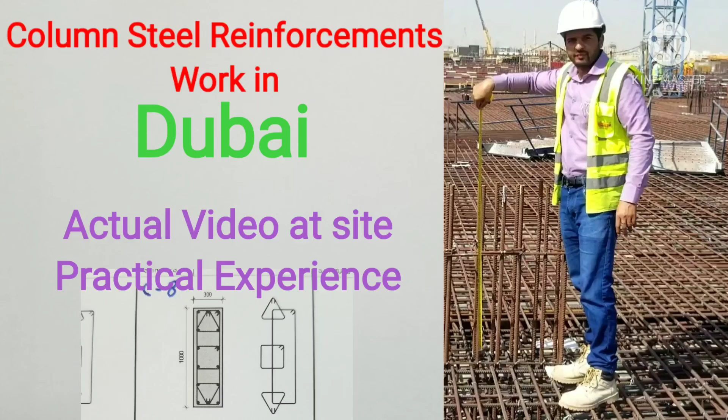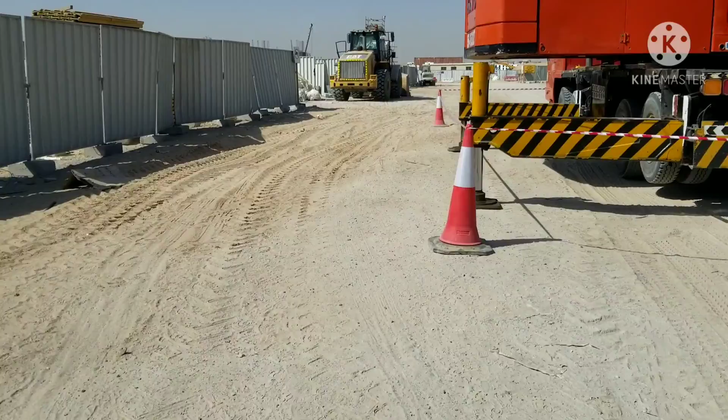Assalamu alaikum viewers. Today I will show you how to check steel reinforcement for column and how to execute column as per drawing. This procedure is followed in all GCC countries, especially in Dubai. I've been working for 7 years in Dubai and completed about 8 to 9 projects in this duration, and now I will show you how to check steel reinforcement as per drawing and how to execute the column step by step.

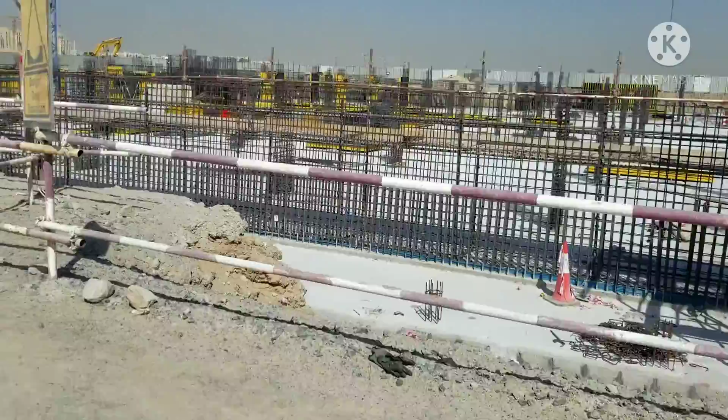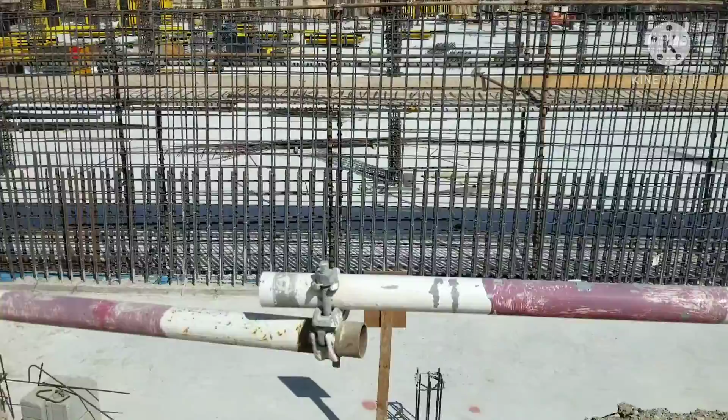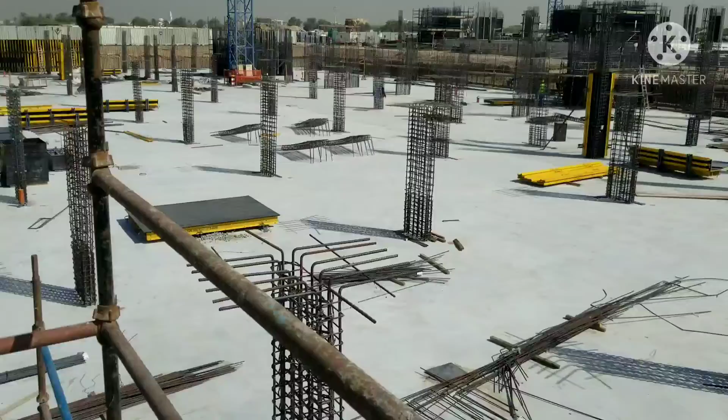So this is our new project, basement plus 10 floors, and now we have only casted raft foundation. After raft foundation we started steel reinforcement for column. See, this is the retaining wall, and now we are proceeding for column steel reinforcement and retaining wall. At the beginning stage we just casted raft foundation, and after raft foundation we started steel reinforcement fixation for column. All the steel reinforcement is done for column; just we will check with the consultant. After getting approval we will proceed for shutter and concreting, then proceed for ground floor slab, because this is the basement. In this building we have basement and 10 floors.

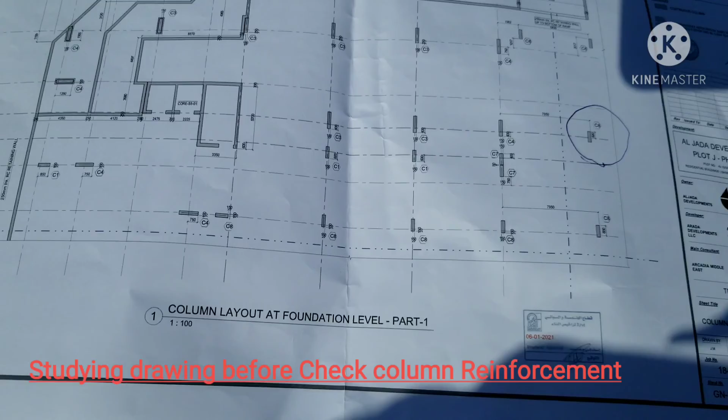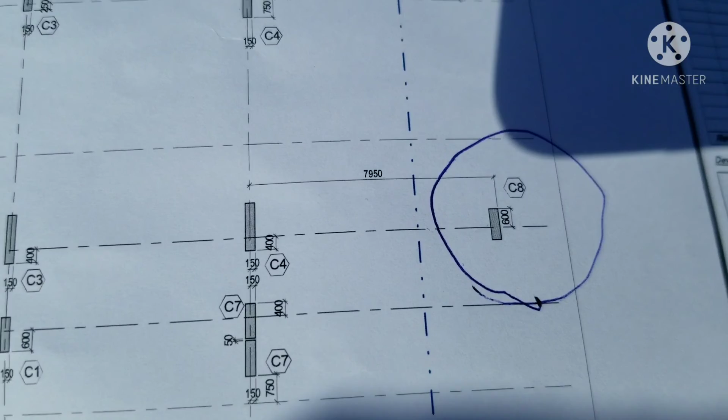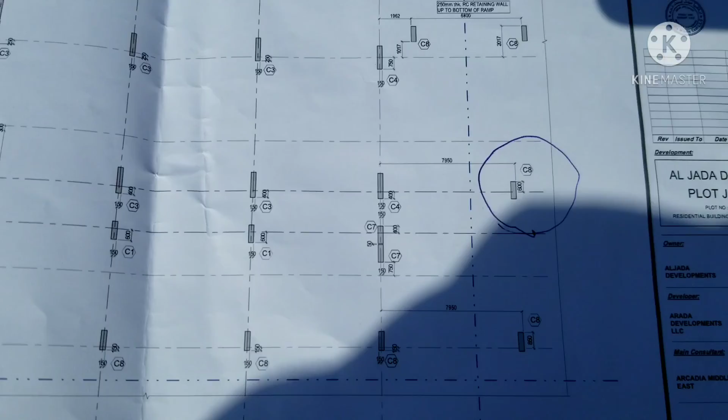So this is the drawing with me, column layout at foundation level, part 1. This is the column layout at foundation level. We just casted raft foundation and then started column from basement to ground floor. In this layout I will show you just one column, for example this C8. I will show you how to check if C8 is as per drawing or not. For C8 we will check the schedule, because in all Dubai and GCC countries the same procedure is followed.

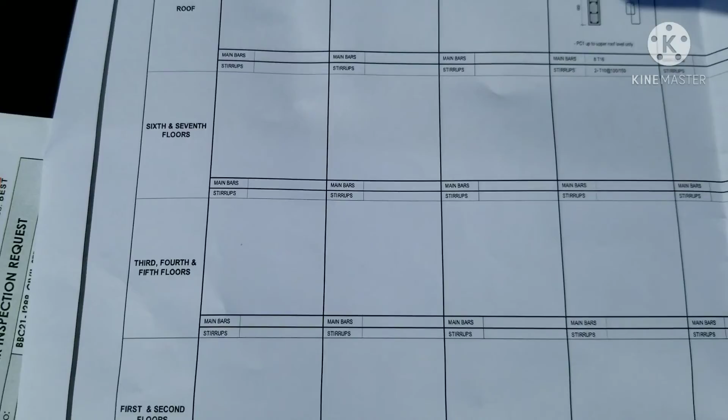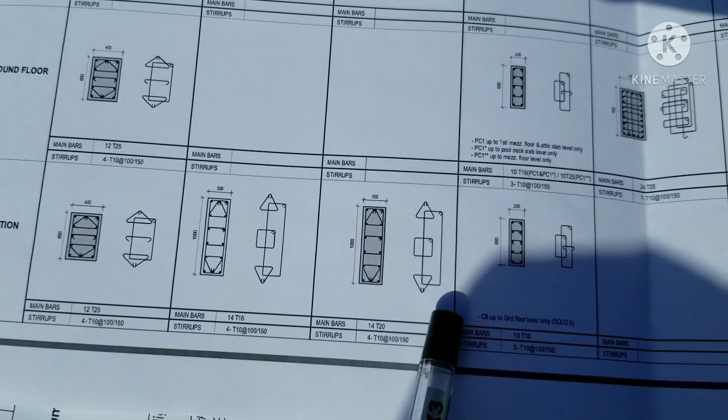They will give you one code number for the column, like this one is C8. For C8 detail we will check the schedule. So this C8, we will come down. What is the size of this column? 1 meter by 30 cm. So the column size is 1 meter by 30, and this is the separate rings detail. How much stirrups? 1, 2, 3, 4 stirrups are there. And this is the detail for main bars. Main bars mean vertical bars - this is the main bar. So how much? 14 T20, so there are 14 vertical bars of T20.

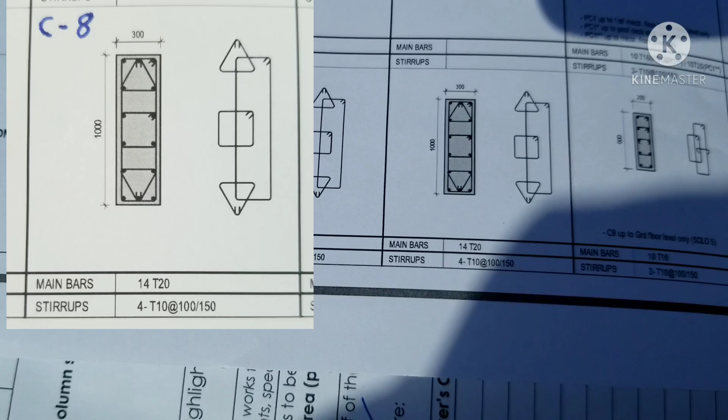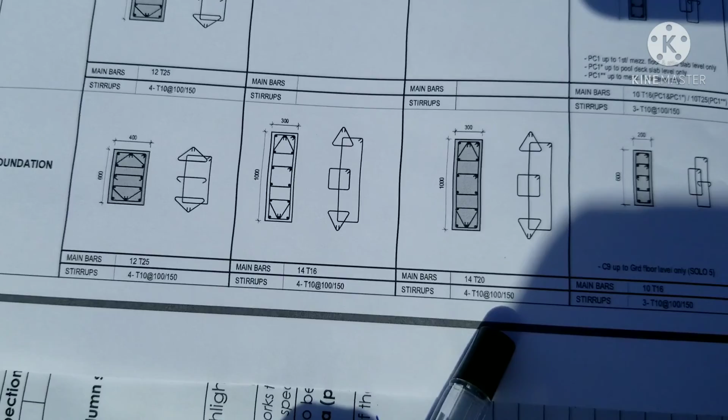And the detail for stirrups - this is stirrups. What is detail? 4, it means 4 number of stirrups. Dia of stirrups is T10, and spacing is 100 or 150, meaning 10 cm or 15 cm. Why 10 cm and 15 cm? Because 10 cm is in our lap area - down from the top till 1 meter will be 10 cm, and up it will be 15 cm. I will show you in the executed column practically what this 10 cm and 15 cm spacing is.

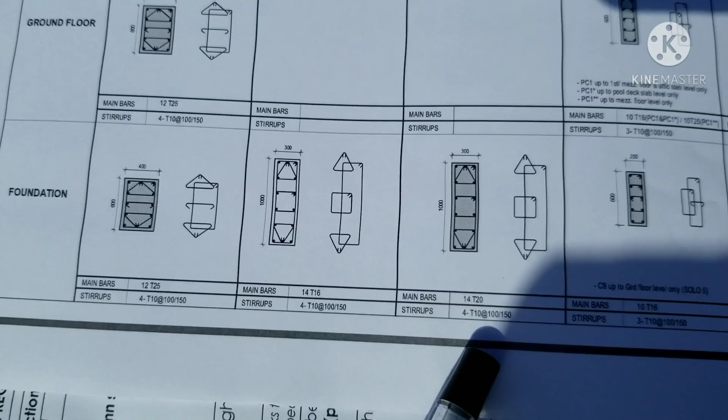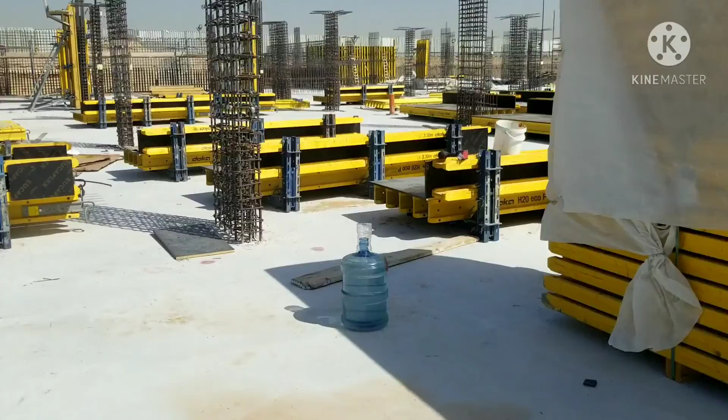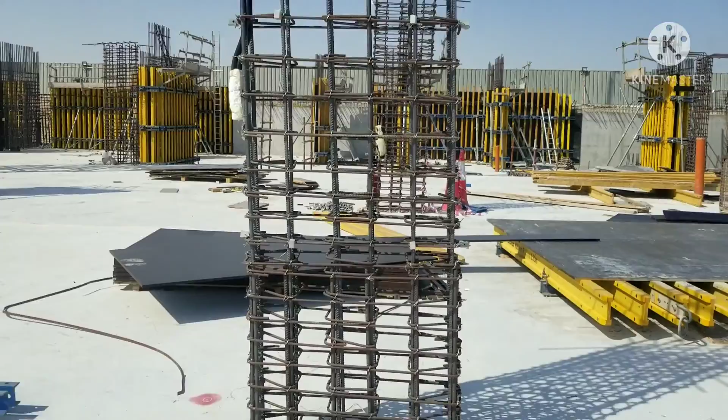So this is the drawing, how to read the drawing and plan. Now we will go practically - I will show you how to check. So this is the C8 column. Now I will show you how to check steel reinforcement for this column and what is the main technical tips to fix the column.

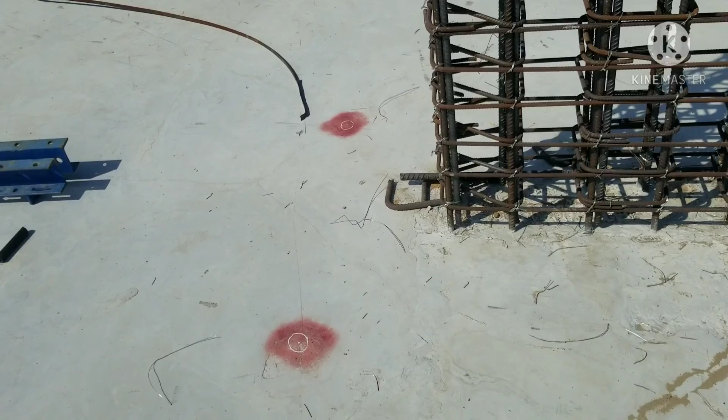First of all we need to check if the drawing is approved or not. We need to check as per approved shop drawing, and which is the final drawing - we will check as per the final drawing.

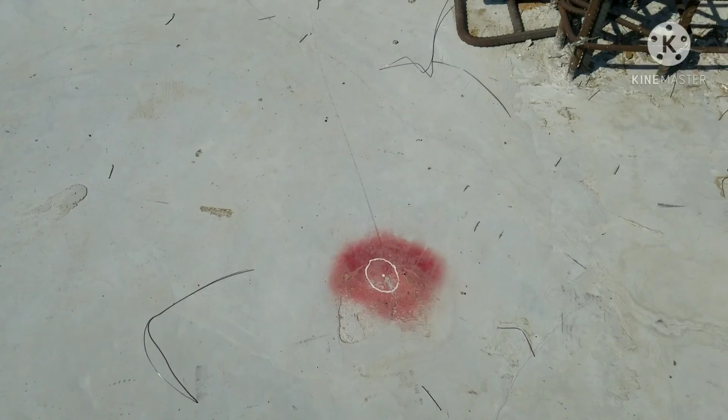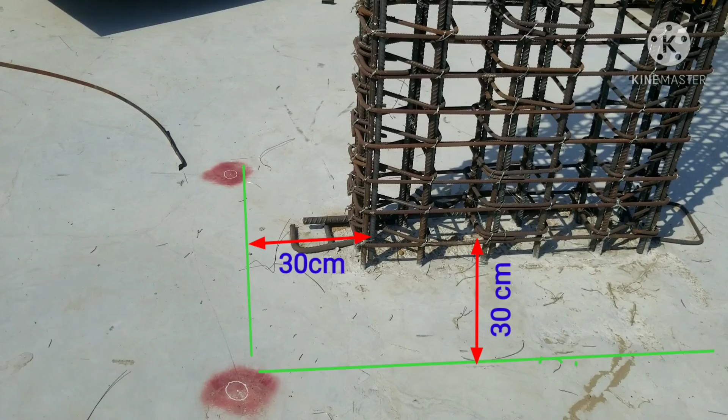The second thing, before checking the column, we have to make sure that the column is on location or not. Normally in GCC countries and Dubai there is one team - site engineer, surveyor, quantity surveyor, foreman. For confirmation of column location, we will call the surveyor. He will give us coordinate points like this - this is our reference coordinate points. He gives 3 or 4 points, and from these points the steel fixer or steel foreman will execute the column. After fixing shutter, we can check the column location from this point also.

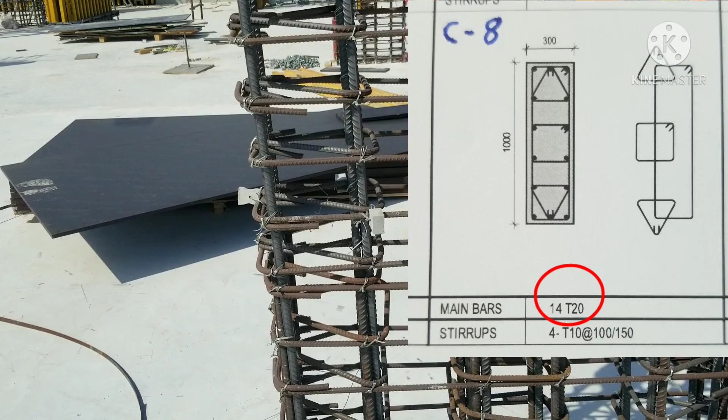After checking the approved drawing and location of column, the third thing is main bar in the column as per drawing. In this column, C8, we have 14 main vertical bars of 20mm - T20, 14 vertical bars in this column C8. 1, 2, 3, 4, 5, 6 on this side, 6 on the other side, so 12, and 2 on the sides, 1 and 2, so total bars is 14. Then size of column.

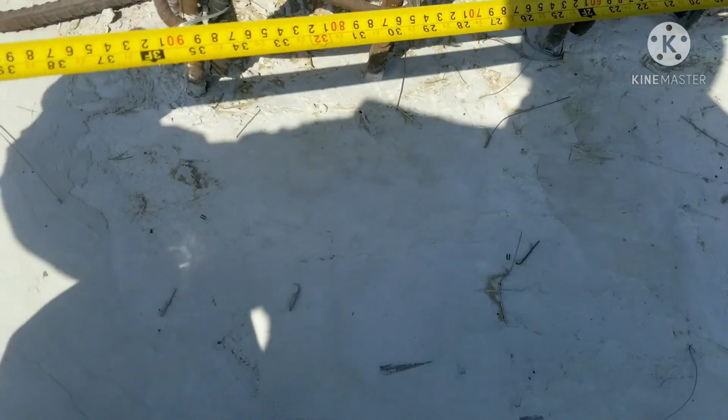So we need to check size of column. In the drawing it's 1 meter column. How much will be the steel? If column is 1 meter, steel needs to be 92, 91 or 92. See, this is 92. The column concrete in the drawing is 1 meter, so steel should be 92, because 4 cm one side cover, 4 cm another side cover, so the total will be 1 meter. This is length of column.

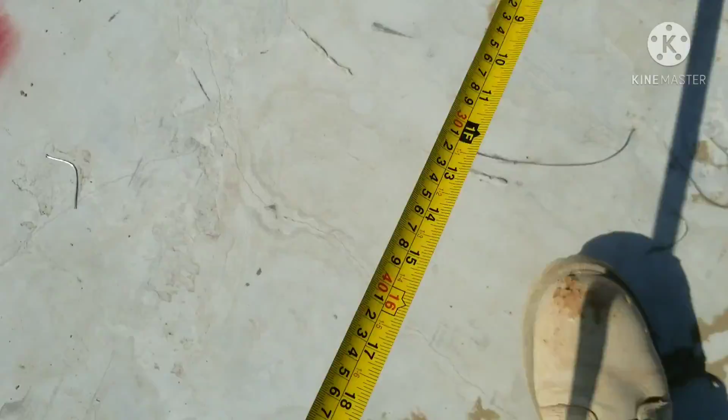Okay, 92. Now we will check width of column. How much? 22. What is concrete of column? 30. So how much steel? 22. So 4 cm one side cover, 4 cm another side cover, it comes to 30. 22 plus 4 plus 4 is 30. So the size of column is okay.

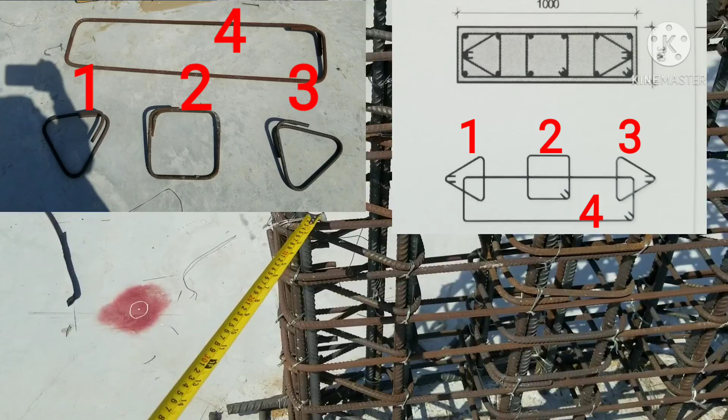So the next thing we need to check in the column steel reinforcement is stirrups. How much stirrups in this column C8 as per drawing? 4, as I showed you. One is this full rectangular ring, 2 are triangular, and 1 in the center is square. Then spacing of column - as per drawing, how much is spacing? 10 cm. See, 10 cm, 10 cm, 10 cm. So till 1 meter, as I told you, as per our drawing it should be 10 cm, 10 cm.

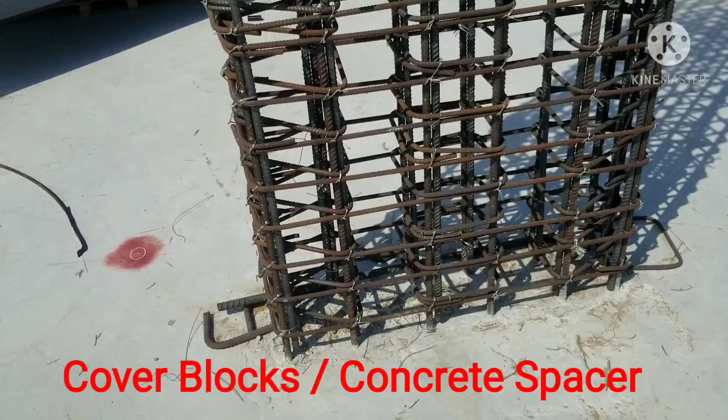Then what do we need to check? We need to check the cover block. See, this is the concrete spacer or cover block. We need to fix cover blocks before closing the shutter. So they're already fixed there - like after 1 meter, one is there. See, this is another one.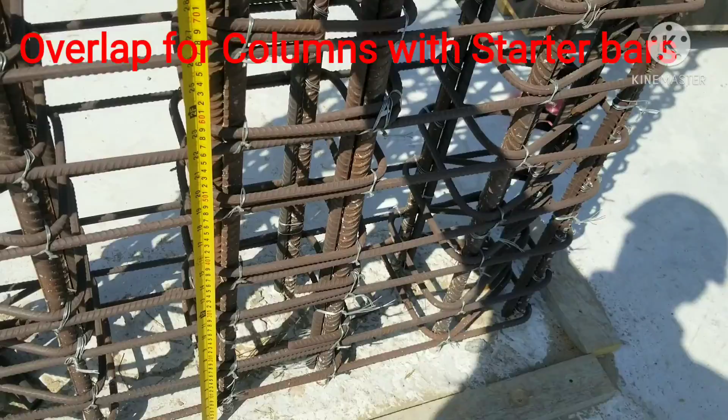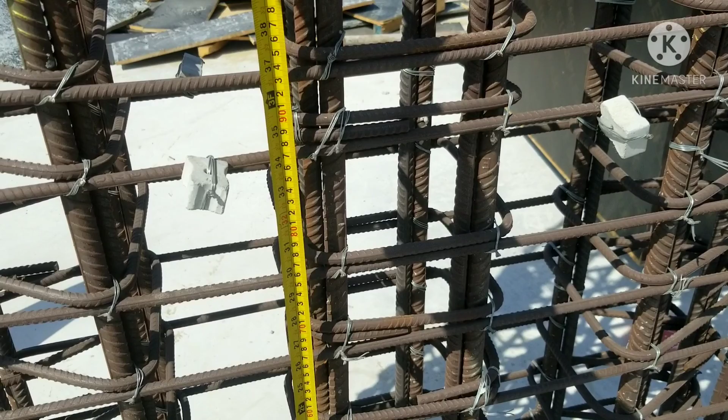Okay guys, the next thing we need to check is our lap of steel. This is T20, our lap should be 1 meter, because we follow 50 dia as per our drawing and specifications - we make our lap 50 dia. So what is dia of steel? 20 into 50, it comes to 1000 mm, meaning 1 meter. See guys, 1 meter. See, 1 meter. Our lap is 1 meter.

So after checking the column steel reinforcement, before closing the shutter, we need to make sure there are no MEP services issues like this. If there is any MEP service, we need to coordinate with the MEP contractor to fix conduits for lighting or fire alarm or anything. We need to make sure there are any services or not. After fixing MEP services, we will proceed for closing shutter like this. So this column's steel, after getting approved and checking, we are proceeding for shutter. We already fixed this one column shutter.